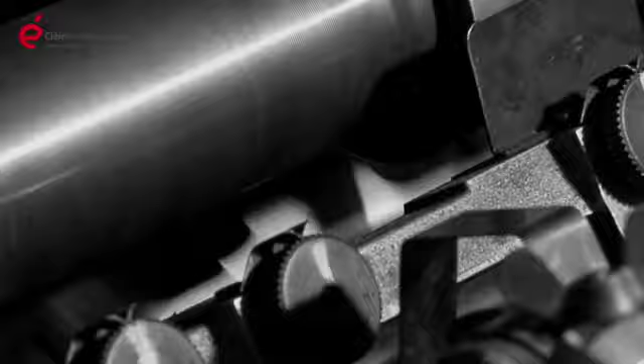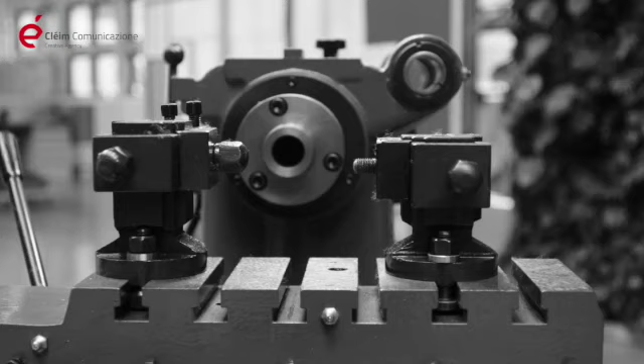Metalwork originated over 50 years ago from a great intuition of Erminio Bonatti. Everything had to be mechanized while the economic development was in full progress. From a little lathe and simple push-in fittings, Metalwork has become a leading company in the automation industry, counting a workforce of over 1,000 people, and is present in more than 40 countries across the world.

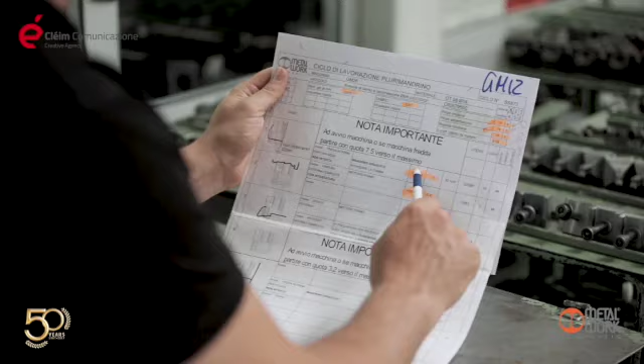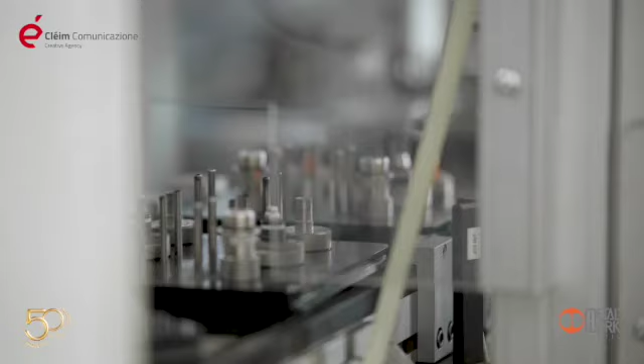One of the aspects that characterize the success of Metalwork is the Kaizen philosophy, which means changing for the better. It is based on the culture of continuous improvement, reducing waste and everything that does not represent an added value. In Metalwork, the Kaizen approach is used in all departments and all corporate activities, starting from the project to delivery of the finished product.

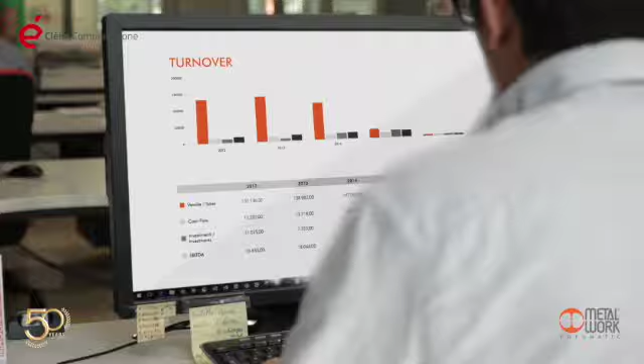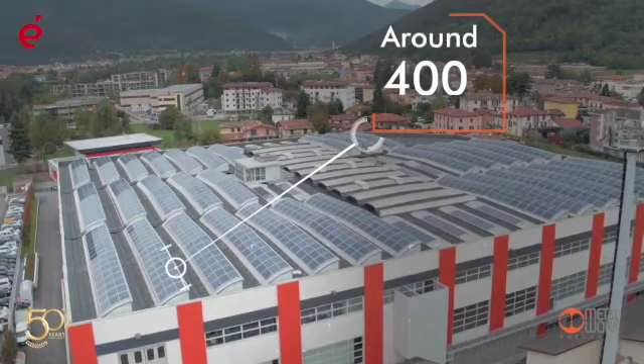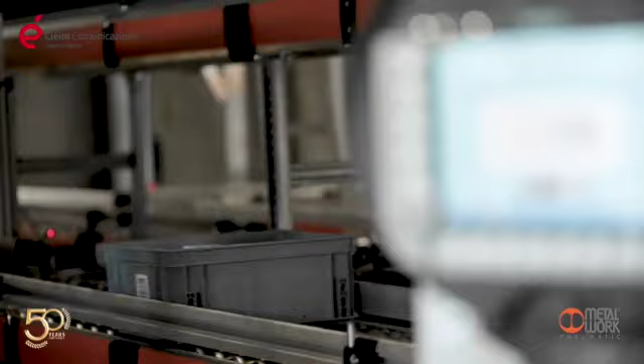The success of Metalwork lies in its numbers, an ever-growing turnover. Its subsidiary companies are spread all over the world. A production hub covering a surface area of over 40,000 square meters, where around 400 people work. A cutting-edge mechanized logistic hub, working 24 hours a day, 7 days a week. All this enables us to fulfill an order within 24 hours for our nearest customers and 72 hours for those from far afield.

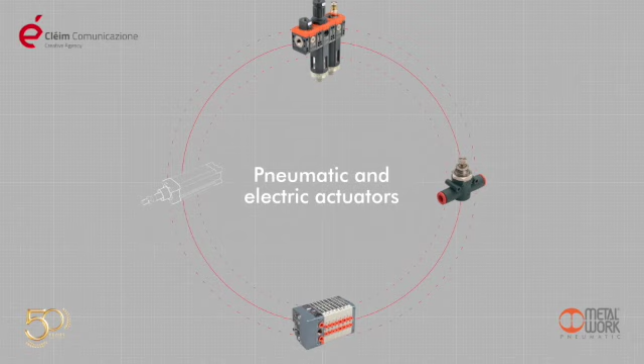Metalwork offers 4 product lines: air treatment units, fittings and plant accessories, mechanical, pneumatic and electro-pneumatic valves, pneumatic and electric actuators. Now, let's see how the Metalwork machine operates.

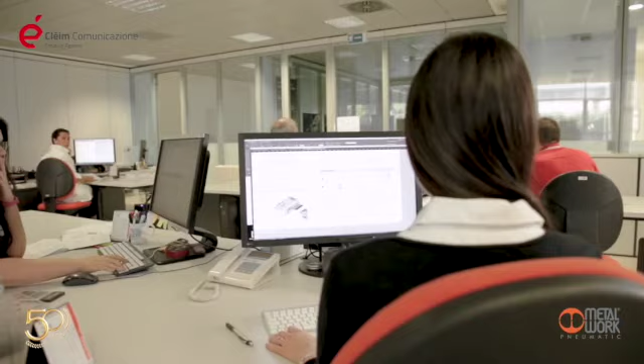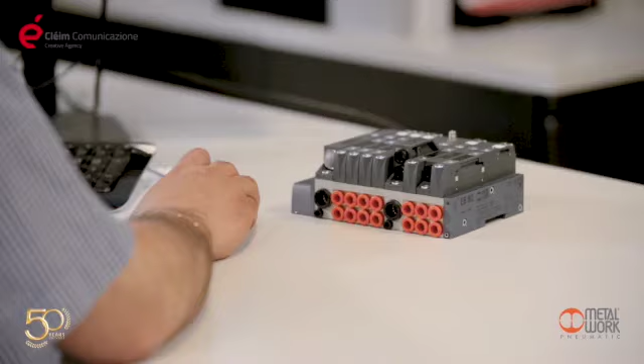Metalwork products are created in the industrialization, product research and development departments, which work hand in hand to integrate key competencies and skills. The proximity of these two departments has the scope of reducing time to market. From the moment the product is designed to its launching on the market, the departments perform continuous tests, carefully monitoring work in progress and any possible critical issues.

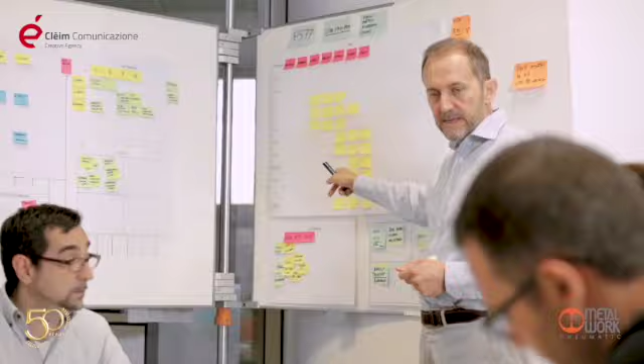The method used is the visual management of activities, typical of the Kaizen philosophy. Another fundamental instrument for visual management is the Deming cycle, an iterative method in 4 stages to monitor and improve processes and products.

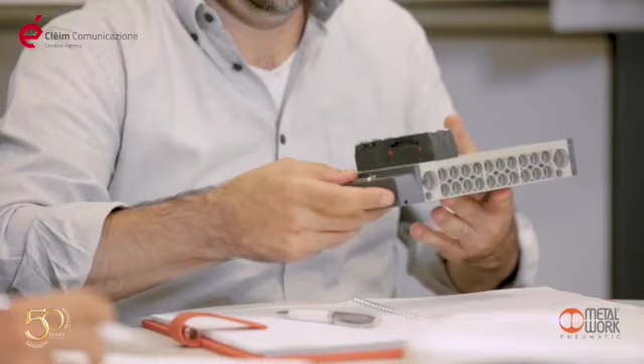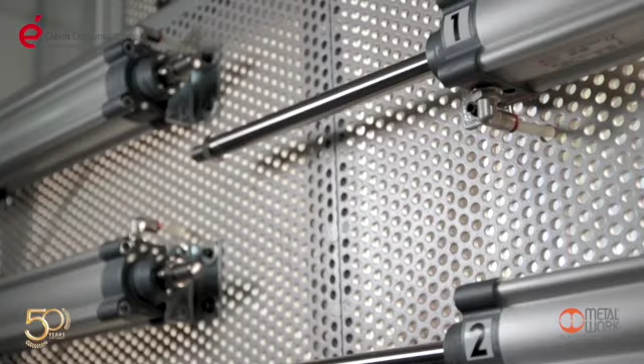After designing the product, we move on to the testing stage. In this department, all new products undergo a continuous cycle of heavy workloads. Any issues are immediately notified to the design and development departments to perform the required fine-tuning operations.

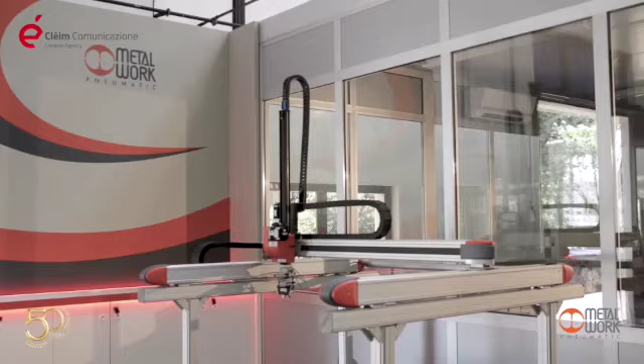Monitoring is an essential part of the Metalwork production, and not only during the initial stage of product development. Other tests are indeed performed during the production stages when any issues are brought to the attention of those in charge of the product. The intermediate check during production enables optimization of the working process.

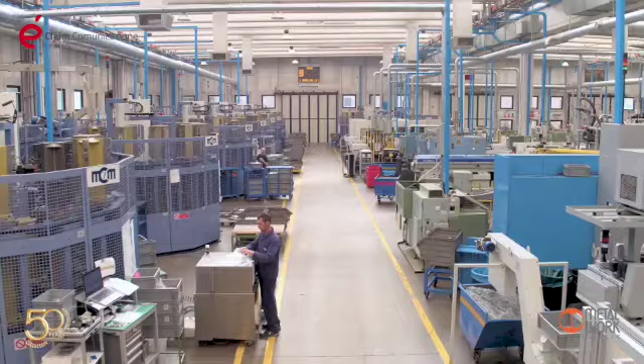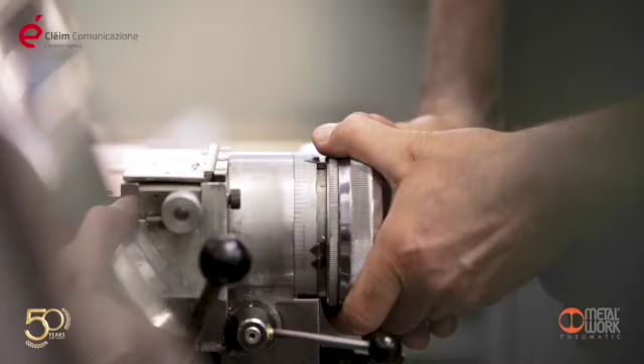Production is subdivided into 3 areas: the tools and equipment preparation area, the machine operational area, and the quality control area. Nothing is left to chance. Everything is standardized. The continuous improvement process is clearly visible at this stage.

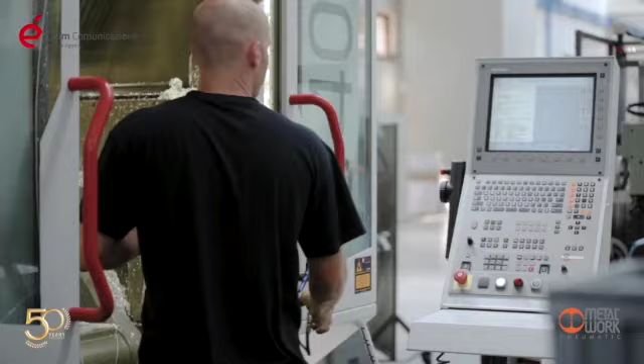Most equipment used for production is made internally. This allows us to save a significant amount of time and to ensure that the results meet production requirements.

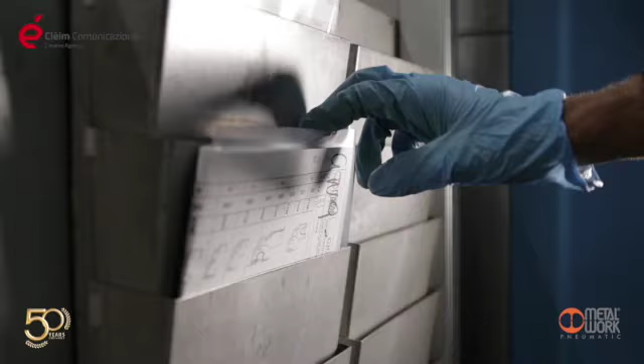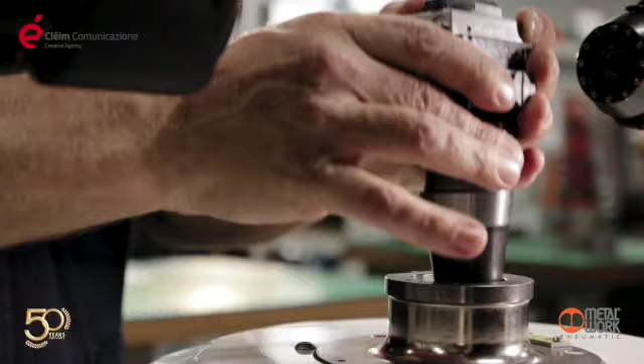A department is specifically dedicated to machine setup. This is where the tools and elements for each production program are set up. Each tool is thoroughly checked, calibrated and positioned on a cart in order to be collected by a tool technician to be assembled on the machine.

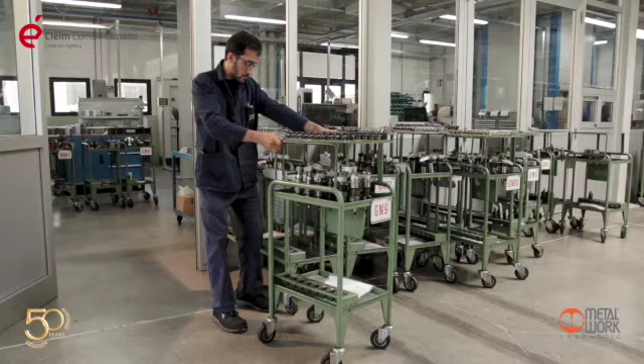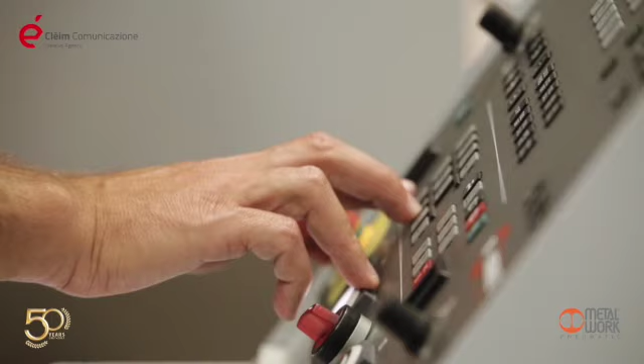Once preparation has been completed, the tool technician collects the cart containing the tools, which are then mounted on the machine. The activity enables reduction of setup times by 80% and enhances the toolmaker's skills so that he can focus on the functioning of the machine and the quality of the result.

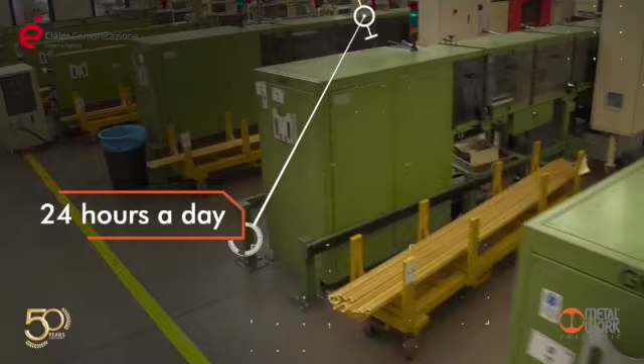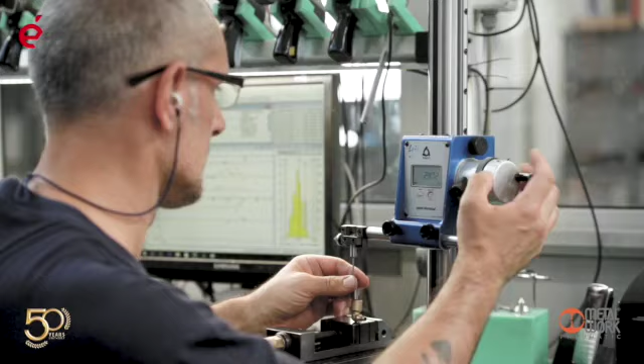The production department ensures continuous production 24 hours a day, 7 days a week, through 3 working shifts. Those in charge of the department monitor each stage together with their employees, in full respect of the agreed deadlines and applicable qualitative standards. The last production stage is Statistical Process Control, SPC.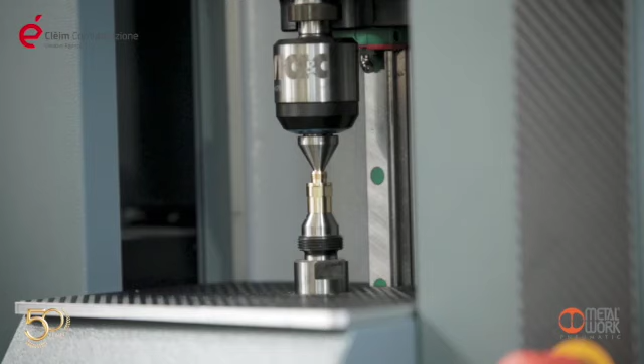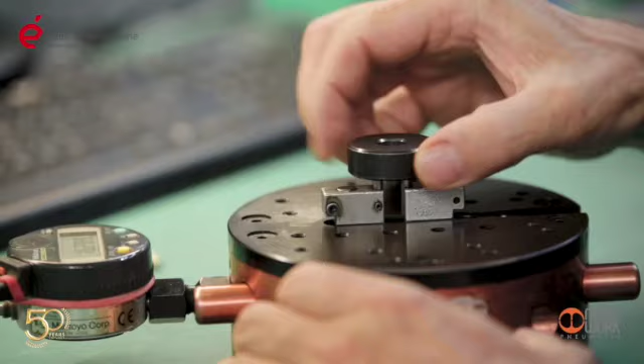Quality control is performed through a sample, optical and numerical system in the metalworking machinery department. If any values exceed the tolerance range, production is interrupted to avoid faulty parts. This is the total quality concept, typical of the Kaizen philosophy, which sets out that a faulty component should never reach the end of production to then be reprocessed.

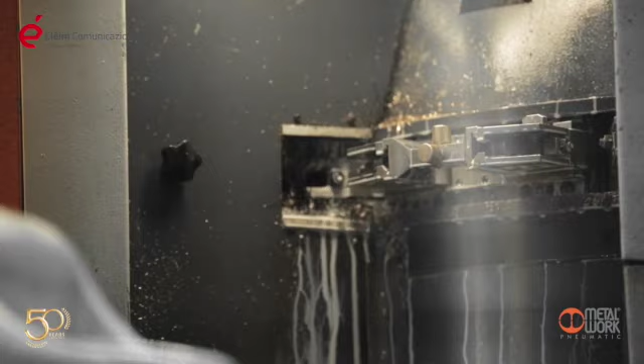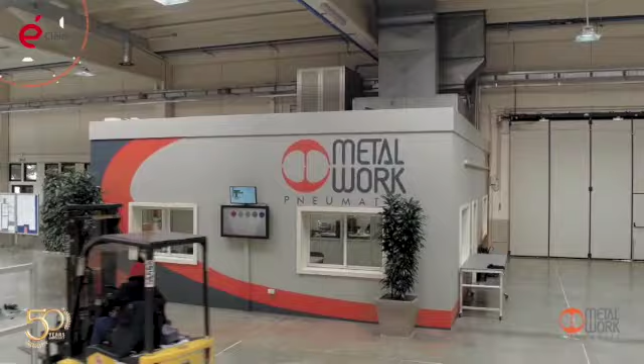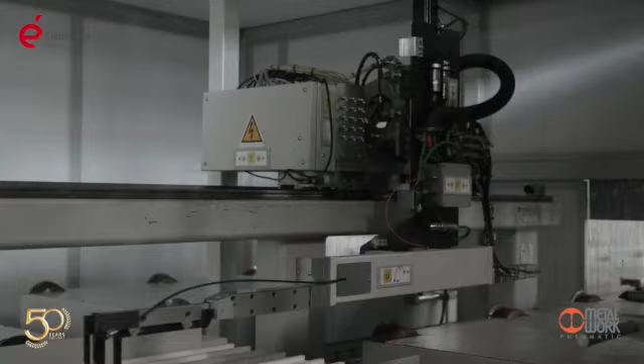The production of cylinders follows a different procedure. The cylinders are available in various sizes and types according to the customer's needs and are made just in time, even in the case of one single piece.

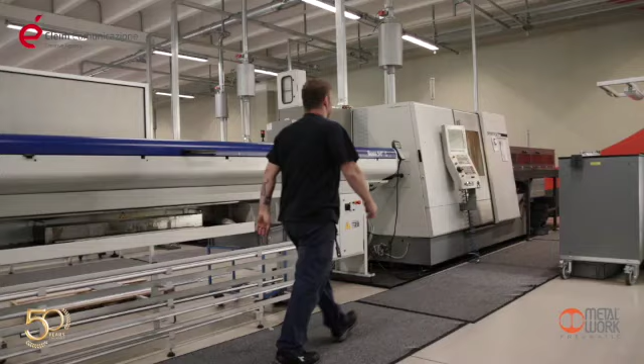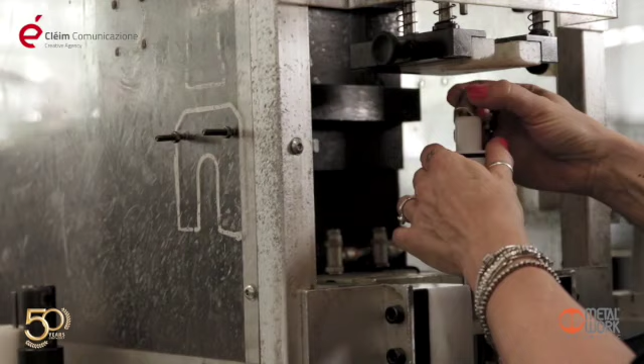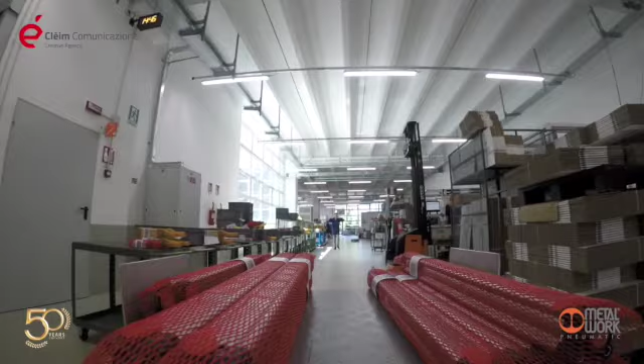The customer's order is inserted by midday and fulfilled within 24 hours. First, the barrel is prepared and then the rod according to the size requested. Then the other components are assembled. Once the cylinders have been tested, they are packaged and dispatched, and in only 3 days they reach any customer in Europe.

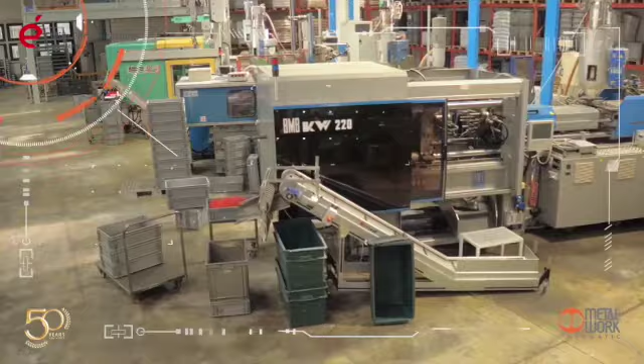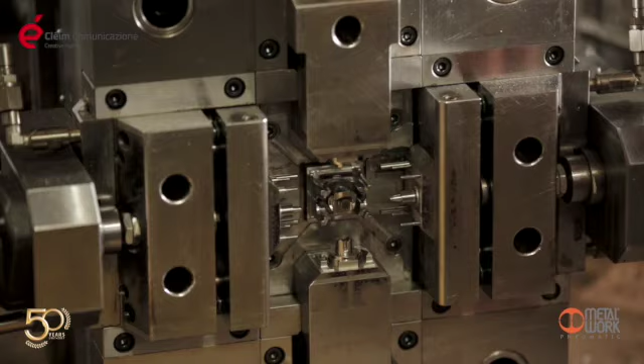Even the production of technopolymer components is internal. This permits us to deliver to the customer a finished product entirely made and checked by Metalwork. The first essential step is the design of each mold, which is conceived internally and then made by selected partners who ensure a very high qualitative standard.

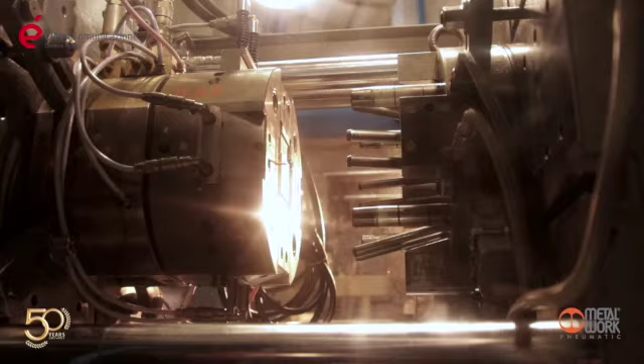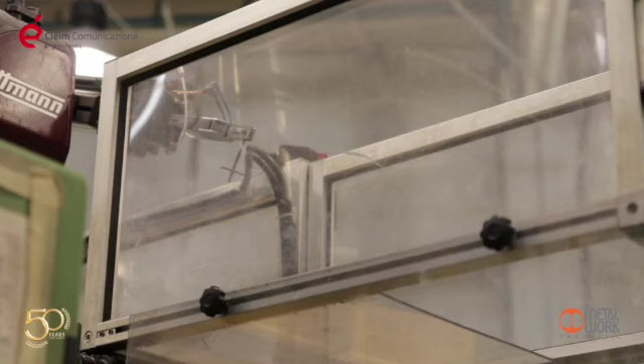The technology used is highly innovative. If you take a close look at each single piece, you will notice its geometrical complexity. It would be very difficult to obtain the same result with metal. In this case, quality control is purely visual.

The assembly area, the final testing of all products, the mechanized logistics center and shipments area are located in the new plant inaugurated in 2016. A great source of pride for Metalwork. This building is a true jewel.

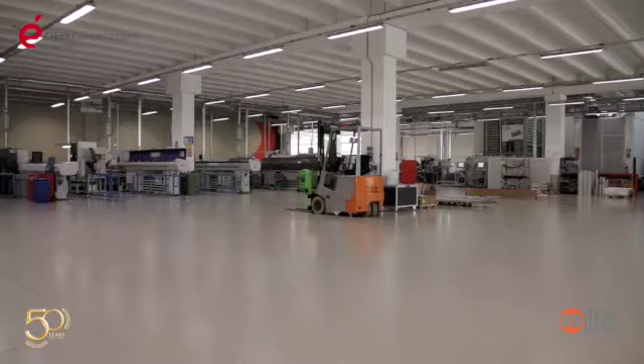Its surface area of 25,000 square meters and innovative design concept comply with high efficiency and livability standards. Spaces, light, air conditioning, everything has been designed to offer an ideal workspace, dedicating special attention to optimization of energy consumption. Its 8,000 square meter roof is covered in solar panels, which on really sunny days meet most of the energy requirements.

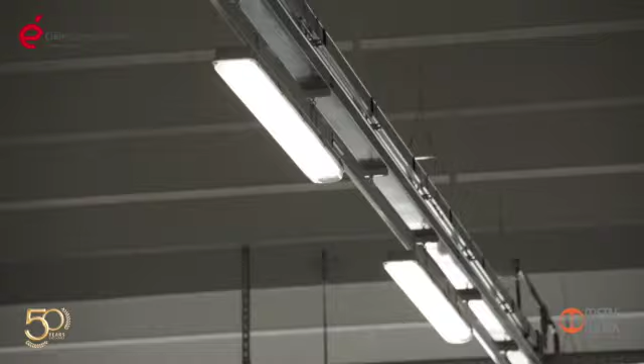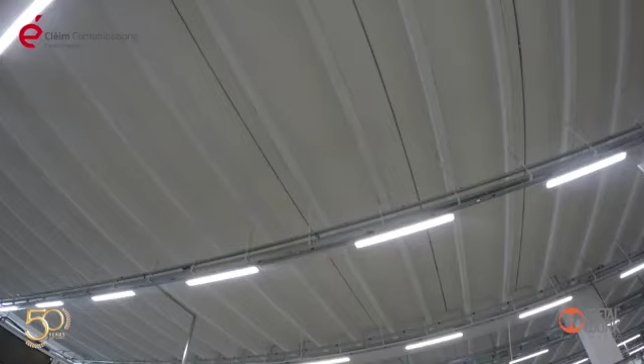2 geothermal wells pull water at approximately 13 to 14 degrees Celsius for heating and cooling the underfloor heating. Internal illumination is entirely LED. And during project development, great attention was dedicated to solar exposure.

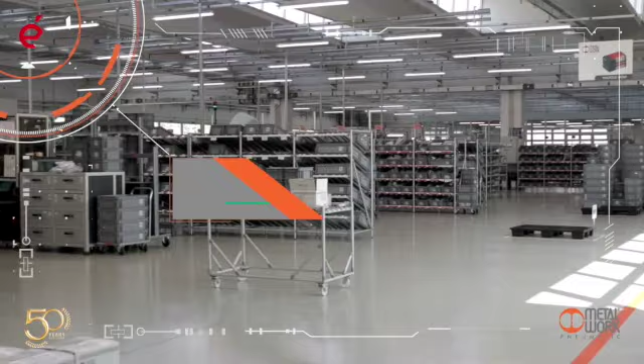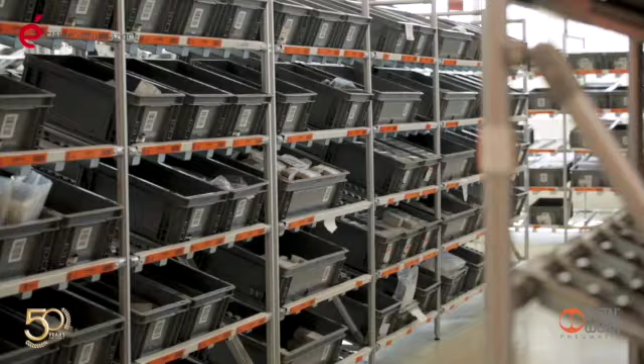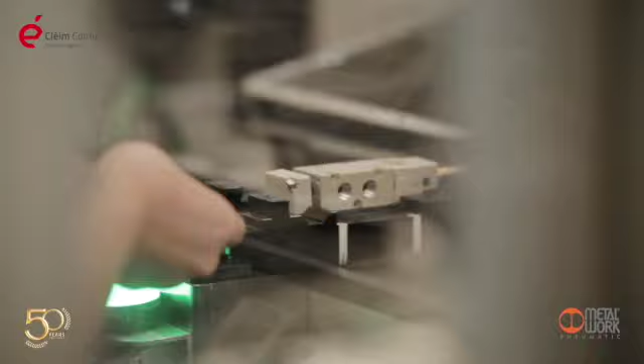This area is organized in several departments, and each of them operates in synergy with the management system. Everything has been designed in compliance with lean production. No waste and maximum efficiency. Metalwork produces only on the basis of orders received from its customers. No storage is envisaged. Each piece lying idle on the warehouse is a cost that must be reduced.

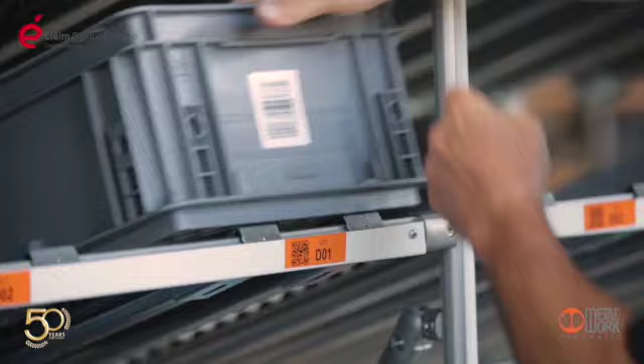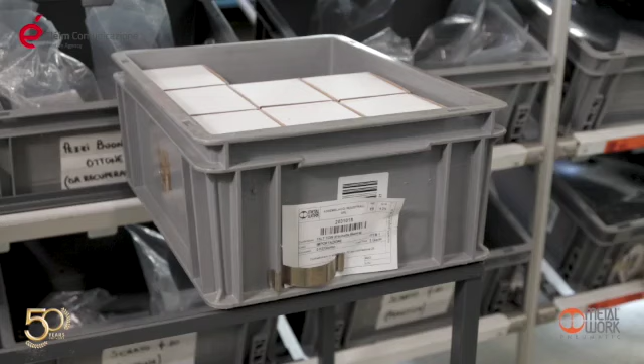Fittings are the only stocked products. Production quantities and replenishment of stocks are managed through a direct system called Kanban, which is also part of the Kaizen method. Each label corresponds to a supply order. As the labels are removed, the minimum stock signal gets closer. At this point, stocks are replenished, with the necessary quantity established by the management system.

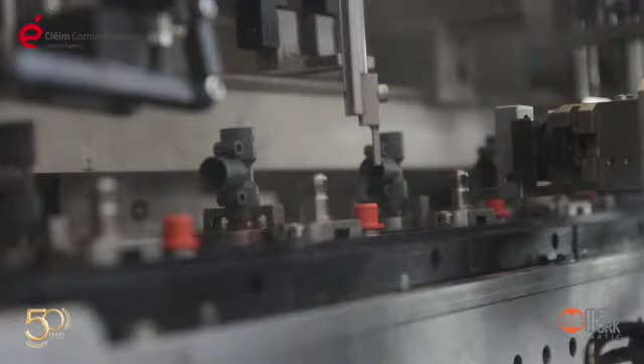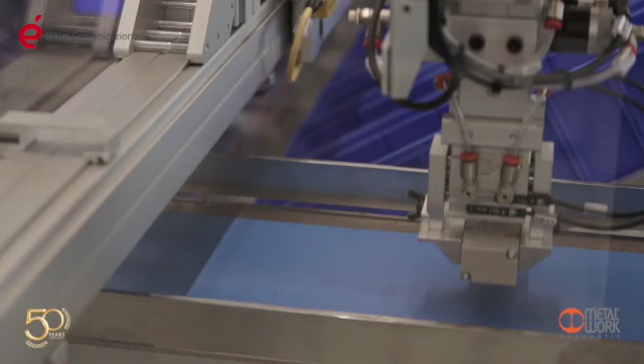Here, the activity is mainly automated, ensuring high production in a short time frame. The other departments are also automated. This machine, for instance, is dedicated to the assembly of valves Series 70. It can manage the entire cycle on its own, including the test and packaging, producing 170 valves per hour.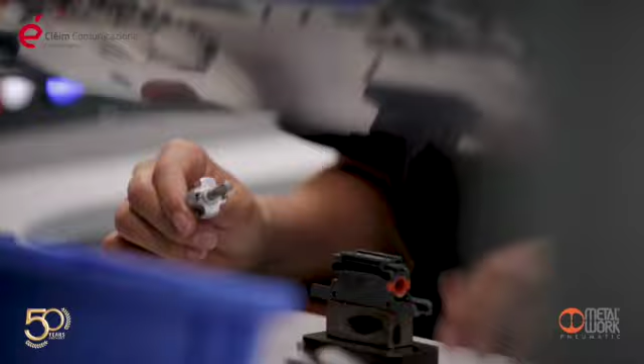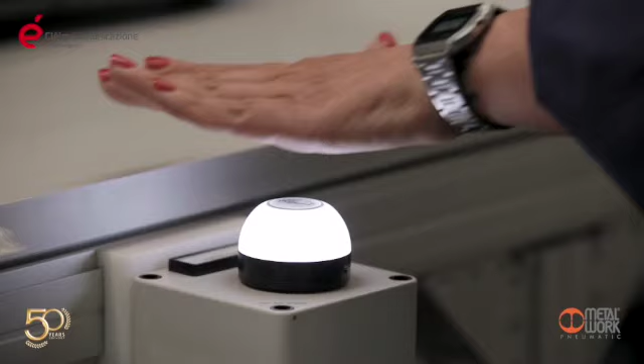On other production lines, usually, assembly is performed manually by specialized technicians. Some products are assembled on the basis of the setup requested by the customer, e.g. EB80. Each island is different from the others. Here also, a monitoring system regulates everything to reduce the chances of error drastically. After assembly, the product undergoes a final test before packaging and shipment.

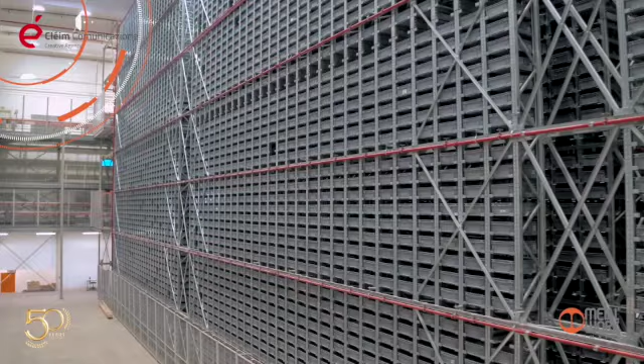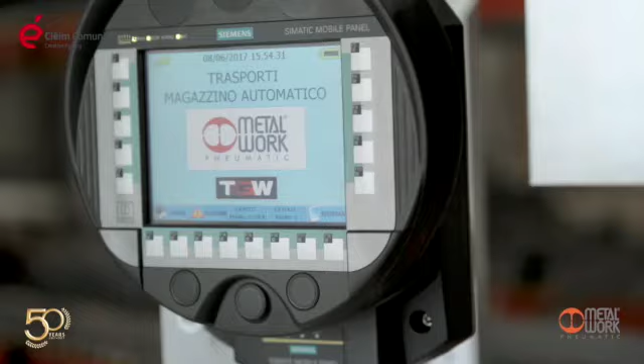The heart of the new plant and logistics is the super technological automated system at the center of the building. It is over 30 meters high. It hosts more than 26,000 drawers and is active 24 hours a day, 7 days a week. It is the hub of all goods handling. Here, both purchased and pre-assembled production components are stocked in order to route them to the various departments.

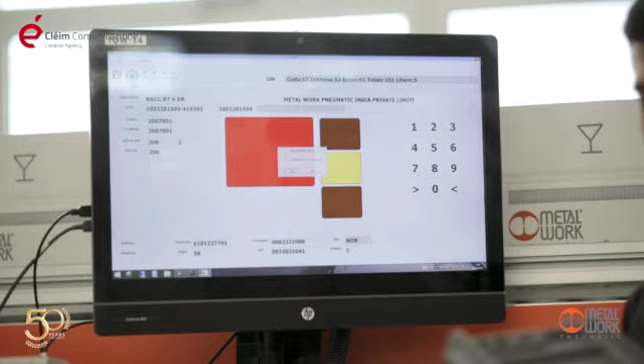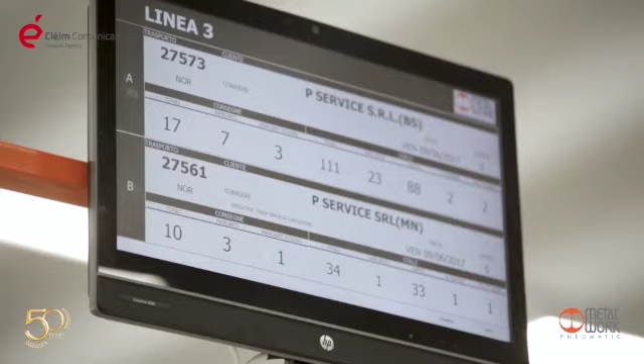This is also where all finished products ready for shipment transit. Fulfilling orders in the agreed time is one of the strengths of Metalwork. The advanced logistics system enables us to insert an order and fulfill it within 24 hours. Once packaged, the product is labeled so that it can be recognized by the system and routed to its destination. All shipments to the Italian and international Metalwork subsidiaries and clients leave from here.

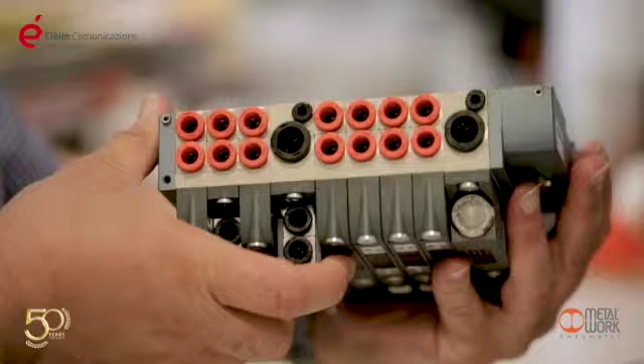Metalwork sets an example of the success of Italian entrepreneurship around the world with a bright future. Its continuity and development are in good hands. Thanks to the Operation of Trust launched by Erminio Bonatti, the management and enhancement of the company in years to come are ensured by a team of managers who have complied with the most strategical aspects of the company for years. Because history goes on, and the last 50 years of ideas, innovation and challenges are only the beginning.